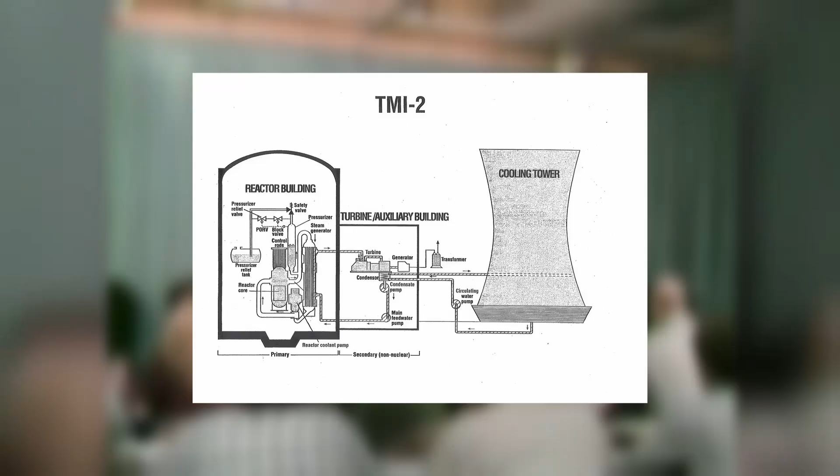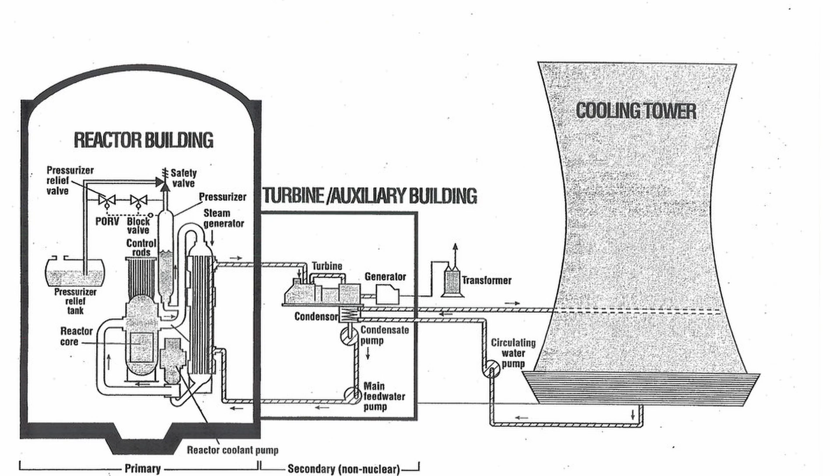To understand what happened, let's first look at how the reactor was constructed. The reactor at 3 Mile Island was a pressurized water reactor, PWR, one of the most common types used worldwide. It consisted of several key components.

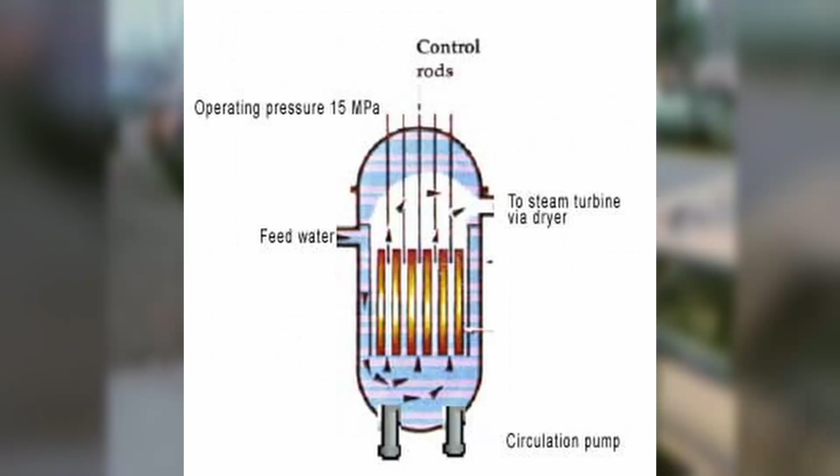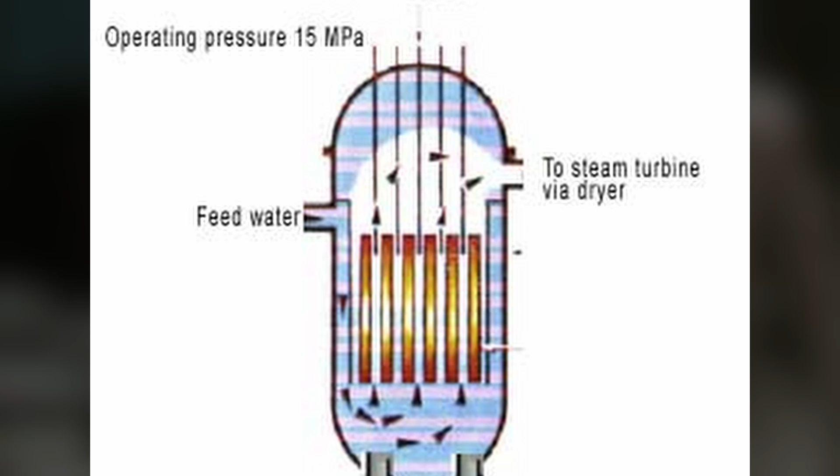Reactor core: this is where the nuclear fuel, typically uranium dioxide, undergoes fission. The core is composed of fuel rods, control rods, and coolant. Control rods are made of materials that absorb neutrons and can be inserted or removed from the core to control the fission reaction.

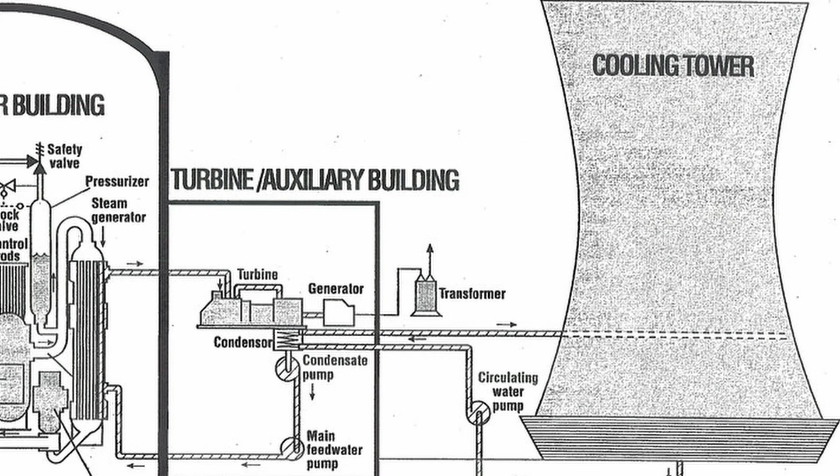Primary coolant system: water in this system is kept under high pressure to prevent it from boiling, even at high temperatures. This water circulates through the reactor core, absorbing heat. The steam generator transfers heat from the primary coolant system to the secondary coolant system, creating steam that drives the turbines, producing electricity.

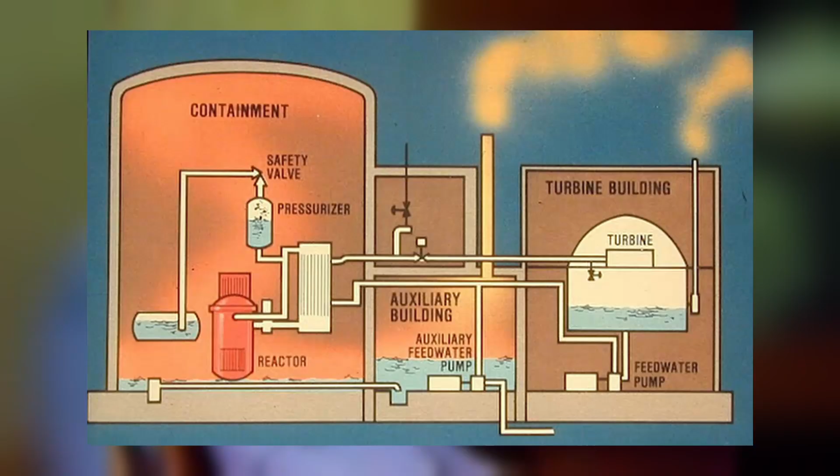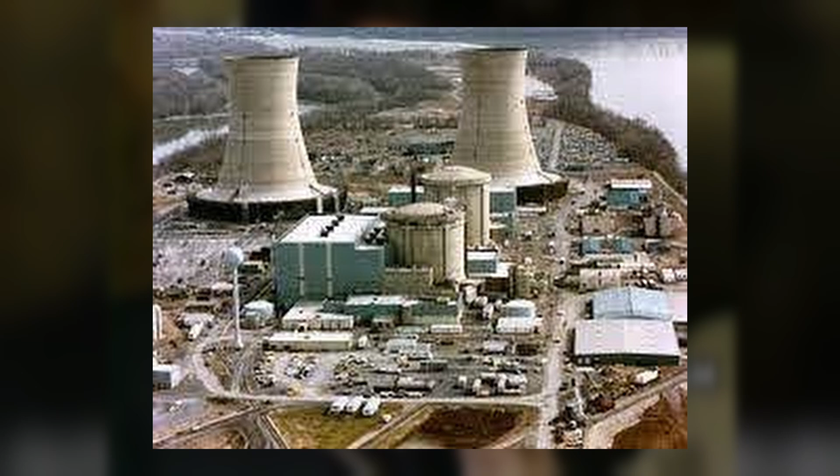Containment building: a robust structure designed to contain any release of radioactive materials. The PWR design is intended to keep radioactive materials contained within the reactor and its associated systems, ensuring they do not escape into the environment.

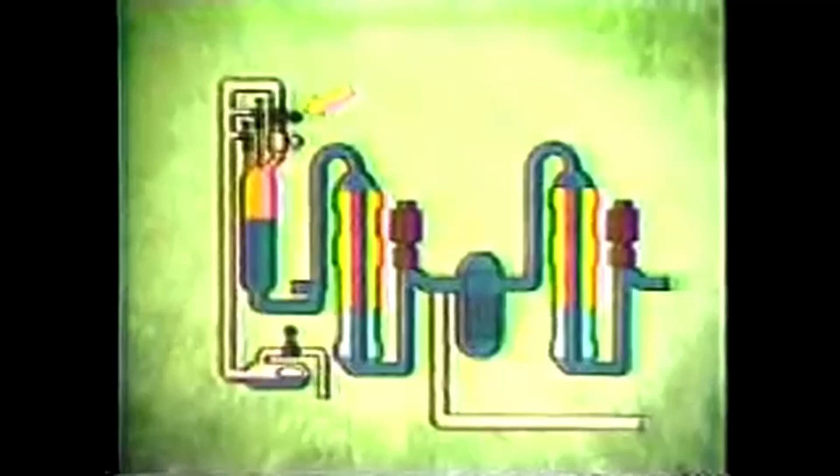On the morning of March 28th, everything seemed normal until a minor malfunction occurred in the secondary system. The main feed water pumps stopped working, interrupting the flow of water to the steam generators. Without proper cooling, the temperature and pressure in the primary system began to rise rapidly.

In response, the reactor automatically shut down by inserting control rods into the core. This was designed to stop the fission reaction and reduce heat production. However, shutting down the reactor doesn't stop all heat production immediately. The decay of radioactive materials continues to generate heat, known as decay heat.

To manage this, the pressure relief valve opened to prevent the system from overpressurizing. But then a critical failure occurred: the relief valve became stuck open, although the control room instruments indicated it was closed. This allowed coolant to escape, reducing the amount available to cool the reactor core.

We faced a confusing situation. The instruments showed that the valve was closed, but it was actually stuck open. This led to a significant loss of coolant, exposing parts of the reactor core and causing them to overheat.

As the coolant level dropped, we scrambled to understand the true nature of the problem. The core was overheating, and a partial meltdown was occurring. Our initial actions, based on incorrect information, weren't enough to stabilize the reactor.

Over the next few hours, we worked tirelessly to restore cooling to the core. We injected emergency cooling water and tried to close the stuck valve. It was a race against time to prevent a full meltdown.

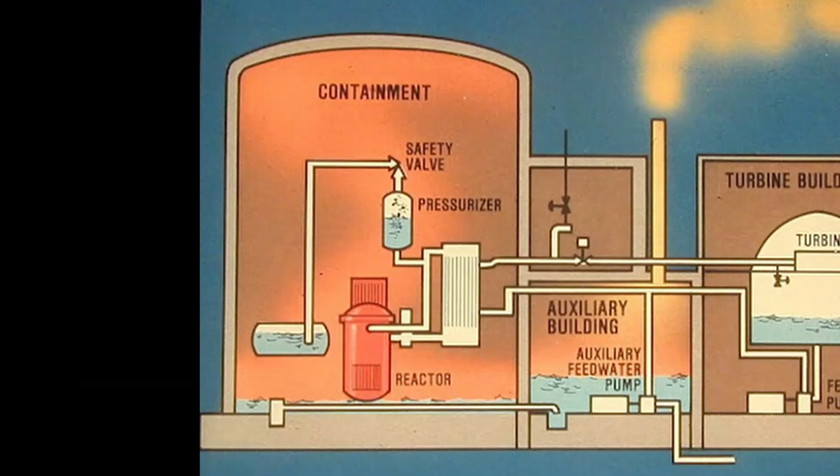The incident was a wake-up call for the nuclear industry. Although there was a minor release of radioactive gases, the containment building held, preventing a larger disaster. No injuries or deaths occurred as a direct result of the incident.

The aftermath of the 3 Mile Island incident led to significant changes in nuclear plant operations, safety protocols, and regulatory oversight. The Nuclear Regulatory Commission, NRC, implemented new guidelines to improve reactor safety, operator training, and emergency response.

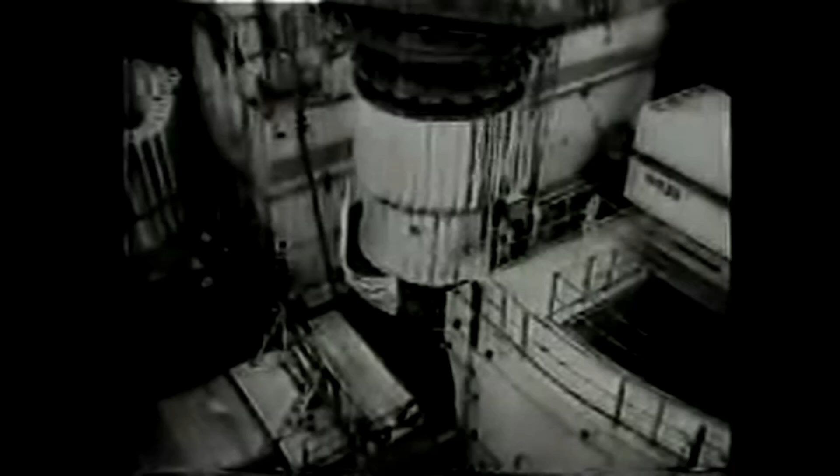The design of future reactors was also improved. Enhanced safety systems, better instrumentation, and more rigorous testing became standard practice. This incident taught us the importance of having accurate information and reliable equipment. It also highlighted the need for operators to be well-trained in emergency procedures.

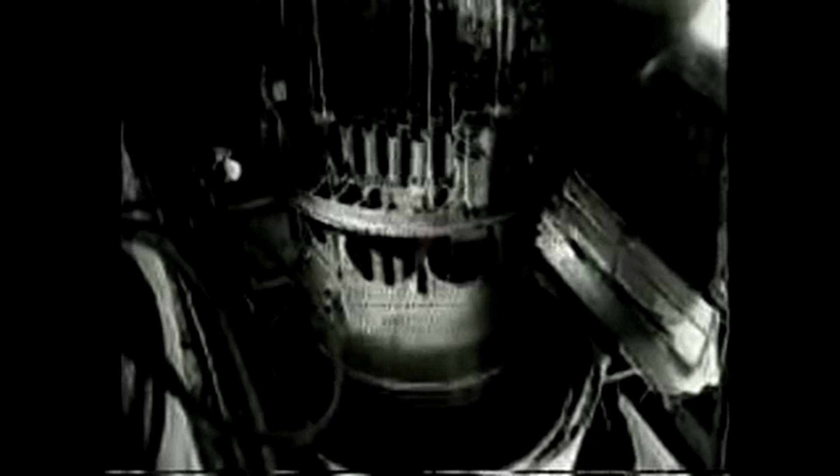The 3 Mile Island incident remains a stark reminder of the potential dangers of nuclear power. It serves as a crucial case study for engineers, safety professionals, and policymakers worldwide. The lessons learned continue to shape the safe operation of nuclear plants today. And that was the 3 Mile Island incident.